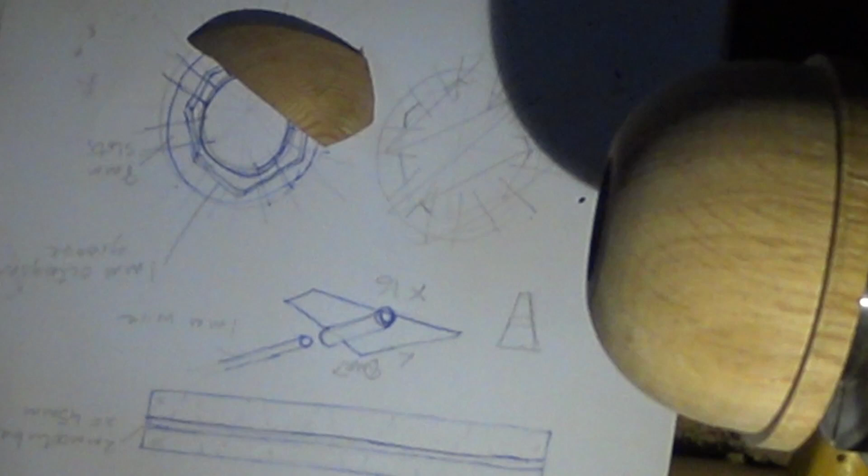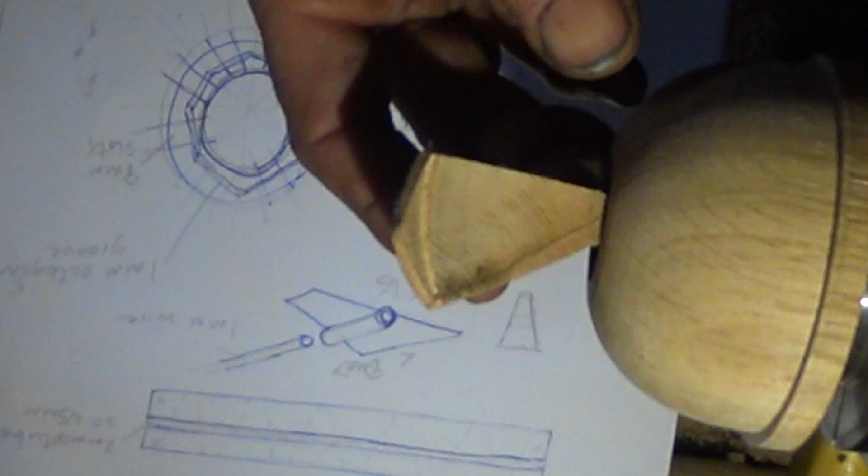Right, this pole sphere, this is my plan. These petals or leaves need to, there's a hole in the top of this. This sphere is just for me to create the hinge, how this is going to work. And to open up, what has to happen is the top part of the petal needs to be pushed into a hole, and then to close, push back out. And that's how the sphere is going to open up and close. So it needs to pivot about this top apex pole of the sphere.

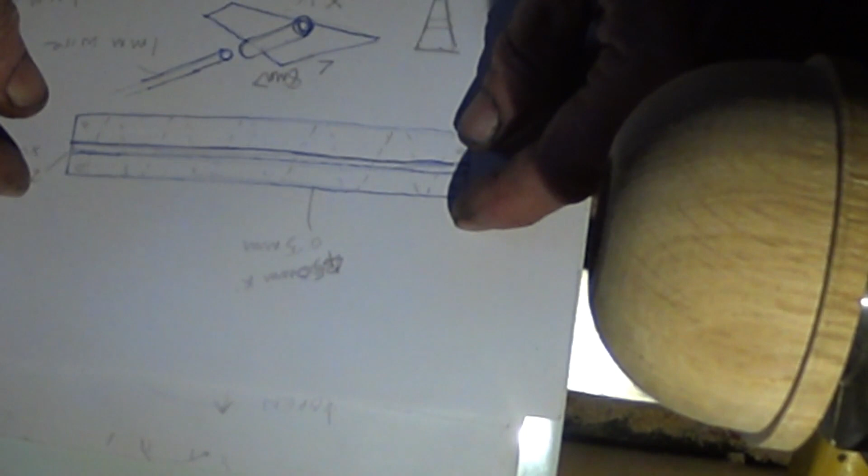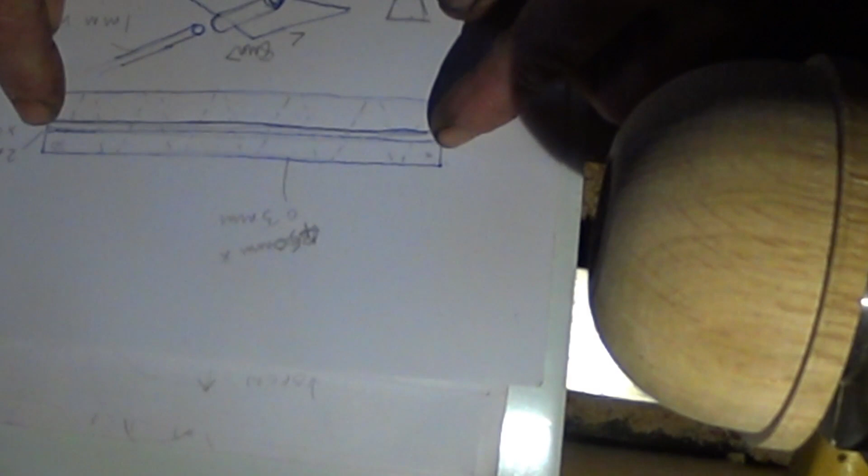So what I have in mind is I'm going to get a long strip of copper, brass, 0.3 millimeter thick. I think it needs to be over a foot, maybe 15-18 inches long, which I can get from a model railway shop near me. Then a tube, 2 millimeter outer diameter tube, which has got 0.5 millimeter wall, which leaves me just over a millimeter hole in the center. I'm going to solder that tube right in the middle of that brass, right along the center, drill some holes, wire it up to hold it while I'm soldering, solder it right along the center of that plate.

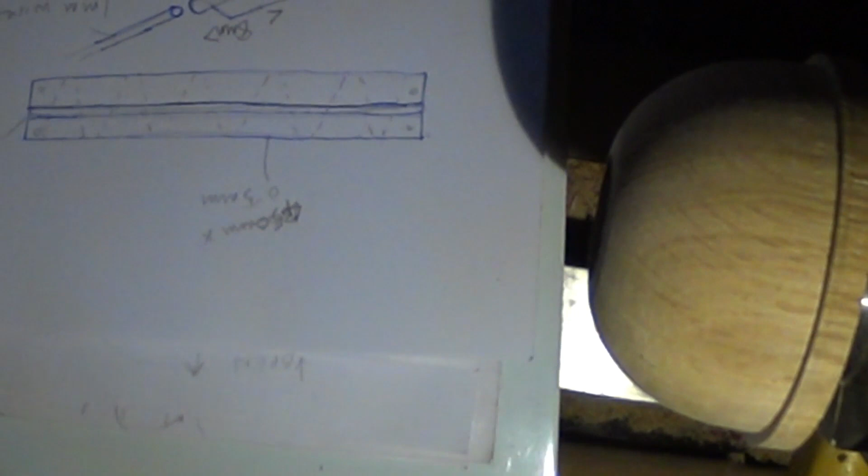Then I'm going to cut out, every other one will be a hinge or a pivot, which will look like so. So that's how I'm going to create all of the hinges at once, rather than trying to mess about creating them individually, with a 1 millimeter wire that can go through it.

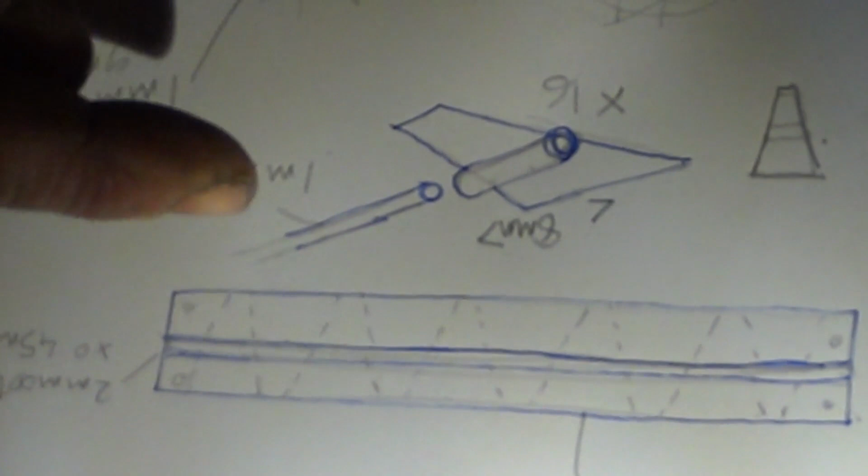And how that's going to work is, on the end of this, I'm going to route out a 1 millimeter deep and 1 millimeter wide octagon in the center of the flat section on the end of this. Then I'm going to put 8 millimeter slots, again with a router coming in, 8 of them into the centers of each part of the octagon, and that's where the hinges are going to sit.

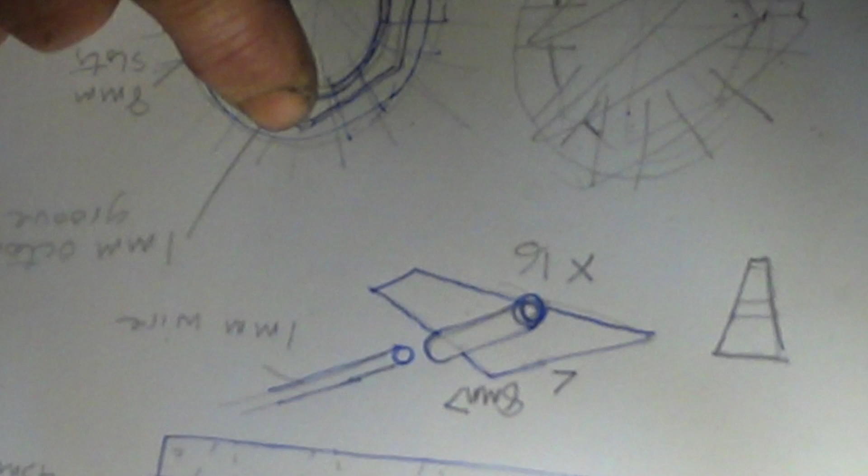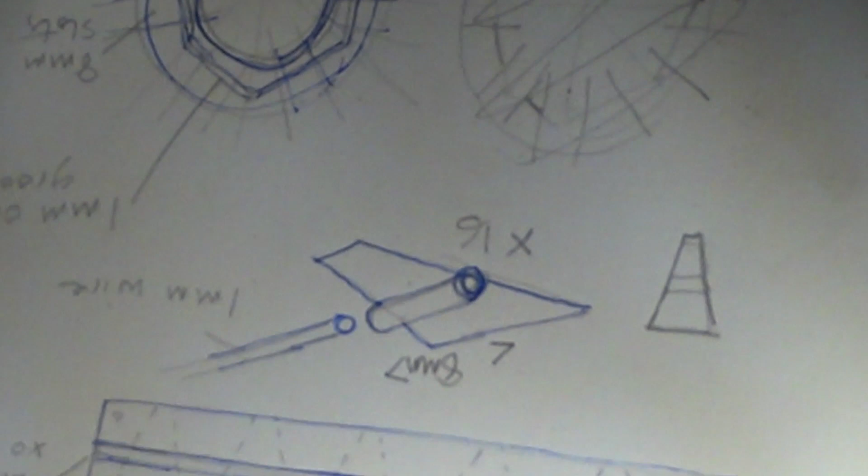Then I can start the wire at one of these edges of the octagon, run it along, thread a hinge on, push it back down, bend it at the next one, put another hinge on, push it down, bend it at the next junction, and carry it on all the way around. So in the end I'll have 8 hinges around the top of this.

The core of the eventual sphere is going to have that same structure on each end, because it'll be like a little core, like an apple core, dishing in, coved in to the center. And I want to put something fancy in the center, like maybe a captive sphere, if there's space, because it's not very big, but if there's space for a captive sphere, I'll put a captive sphere in the center.

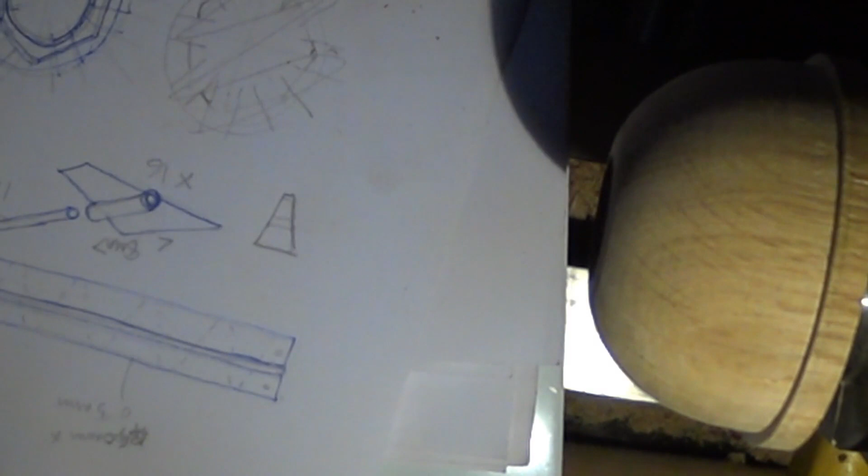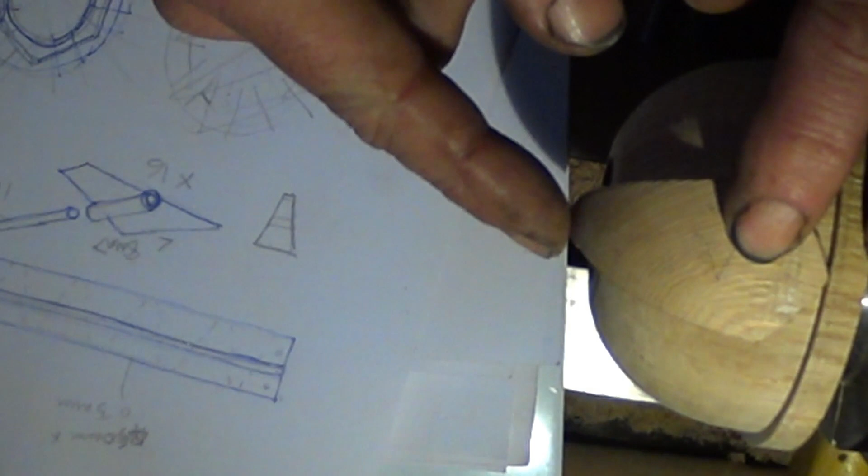It might be different at the bottom. I'm going to deal with that when I come to it. The closing at the bottom, I mean, this is going to close under gravity, maybe. The bottom, I'll have to think of something when I come to that point. Anyway, that's the plan. Thank you.